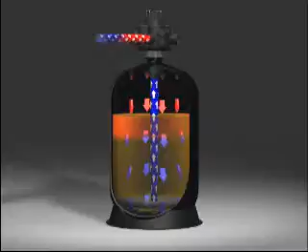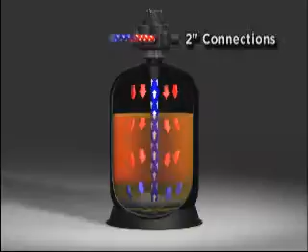Hydrus, an entirely new concept in commercial and industrial water treatment, is a multi-port valve utilized in ion exchange and filtration applications. Hydrus is fully ported with 2-inch inlet, outlet, backwash, and 2-inch riser tube connections, and can be top or side mounted on either steel or fiberglass pressure vessels.

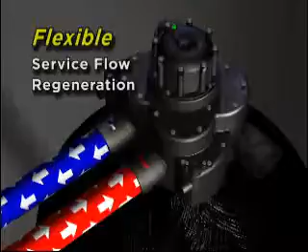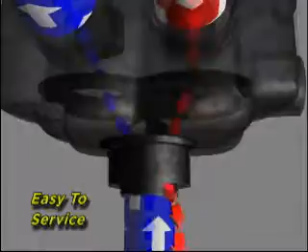It controls service flow, regeneration, and backwash for a variety of applications including ion exchange water softening, as depicted in this video. The valve is constructed of an incredibly durable, non-metallic composite formed into serviceable sections firmly held in place by stainless steel hardware. This lightweight valve is designed to withstand the rigors of industrial applications and has easily passed 100,000 cycle testing protocols.

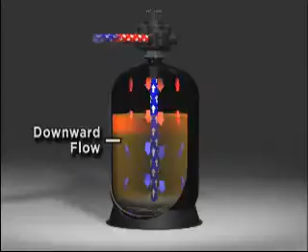During service, Hydrus operates in a downflow mode. Water enters the tank and is dispersed through an upper distributor, ensuring uniform flow across the resin bed.

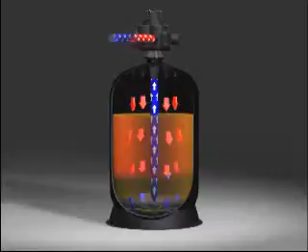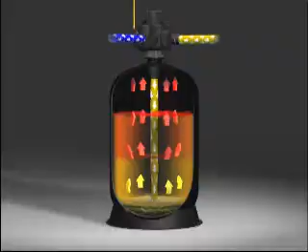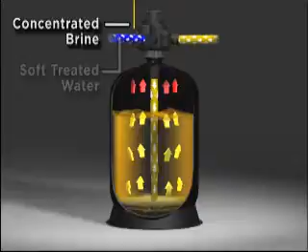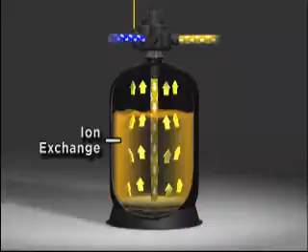In a multi-tank application, once the resin has reached a state of exhaustion, the valve initiates a highly efficient countercurrent regeneration. The first step is to slowly introduce an upflow solution of brine, taking care not to disturb the bed. Concentrated brine is blended with soft treated water and added to the bottom of the ion exchange resin bed. Hardness minerals are exchanged off the exhausted resin as the brine moves up through the bed, then exit the top of the vessel and are sent to drain.

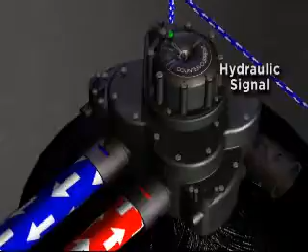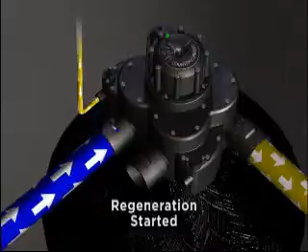To initiate regeneration, the Hydrus valve needs only a stream of water supplied by an external solenoid or valve. This solenoid, available as part of a Smart Start control package, signals the hydraulic control flow to start the regeneration. After the short hydraulic signal, Hydrus automatically shifts into the brine draw cycle.

Hydrus activates internal pistons as it moves into brine draw. The inlet water is shut off and treated outlet water is used to begin the countercurrent regeneration cycle.

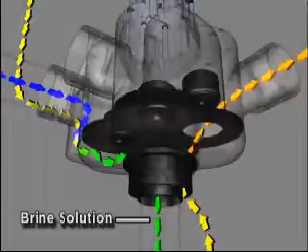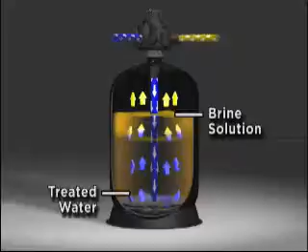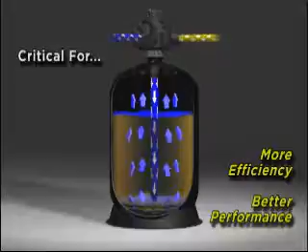Once the required amount of brine has been added to the ion exchange resin, the brine cycle ends and the valve continues with a slow rinse. The brine within the vessel continues its countercurrent travel through the resin as sodium is exchanged for hardness. This step is critical for efficient countercurrent regeneration. The use of treated water for brine draw and rinse prevents contamination of the bed, resulting in much better softener performance compared to downflow or co-current regenerating units.

Countercurrent regeneration reduces salt use and wastewater volumes while simultaneously improving water quality, as compared to older, more common co-current regenerating ion exchange systems.

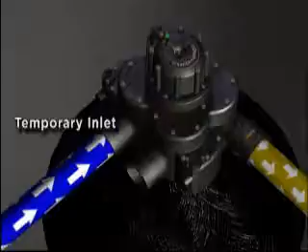During a multi-tank application regeneration, the inlet to Hydrus shuts off to prevent untreated water from entering. Hydrus's outlet port is temporarily converted to an inlet port, so all water used for the regeneration comes from the distribution header and enters through the outlet port.

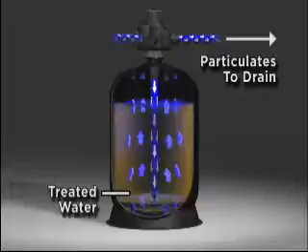After the slow rinse process, the valve shifts into a backwash cycle. The Hydrus control valve uses treated water to backwash the media. The flow rate increases in the upflow direction to remove light particulate matter that may have collected in the media vessel during service and to reclassify the media. This step helps maintain a clean, uniform bed of media.

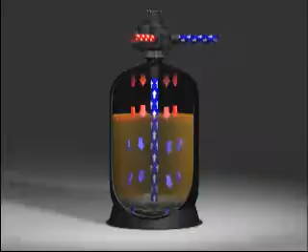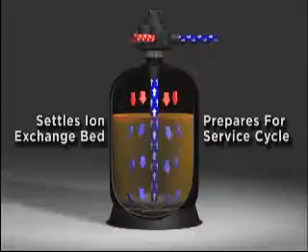After backwash, the valve begins the fast rinse or purge cycle. This brief downflow fast rinse cycle settles the ion exchange bed, prepares it to go into the service cycle, and simultaneously ensures no brine is left in the lower section of the tank.

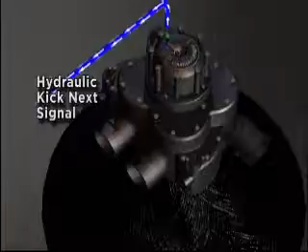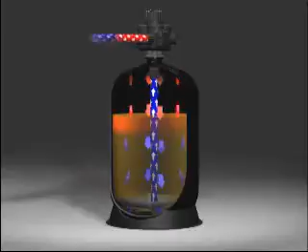At the conclusion of the fast rinse, the valve transitions back into service mode. At this time, the Hydrus valve automatically emits a hydraulic signal transmitted to the next Hydrus valve in the series. This kick-next signal is maintained long enough to ensure the next softener tank begins to regenerate. The kick-next function ensures that the next softener in the train begins to regenerate at the correct time and eliminates the need for redundant and complex control systems.